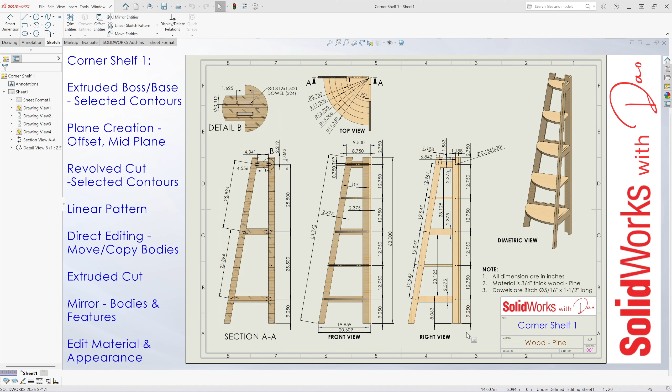File, new, part, okay. Save drawing as corner shelf 1.

Go to System Options, Document Properties tab, Units. Make sure the drawing is in inches. Dimensioning in length to 3 decimal places. Okay.

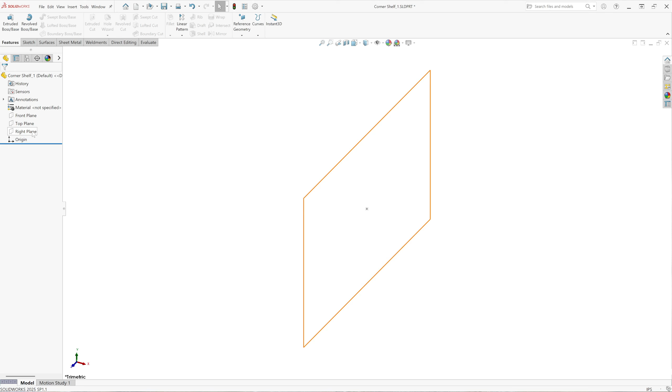Apply scene. I'm going to change the scene to plain white. I'm going to start off by drawing in the right plane. Select right plane. Sketch. Draw a rectangle.

I'm going to window select these 2 vertical lines, make relations vertical. It's not showing here. Okay. Window select these 2 horizontal lines, make relations horizontal. I'm going to show relations here, and it's horizontal, horizontal, vertical, and vertical. I'm going to turn it off now.

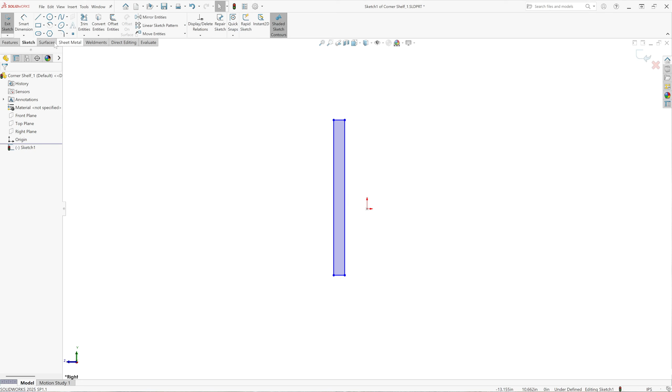Dimension, smart dimension. 2.375, 2 3/8 of an inch. Okay. Dimension vertical line here, 63 inches.

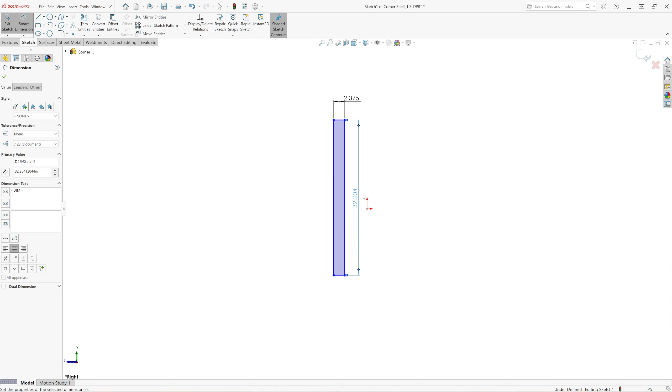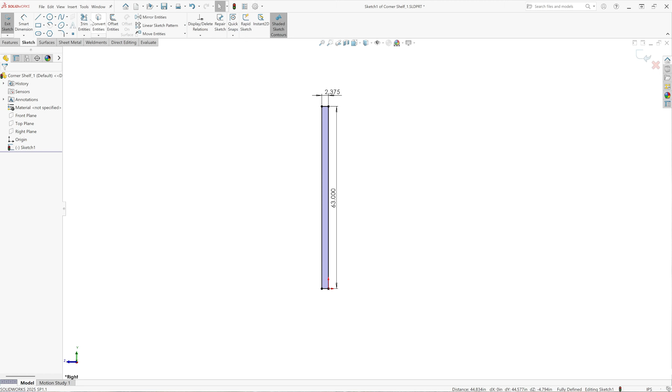Okay, I'm going to select this point, bottom right corner. Hold shift, select the origin, make a coincident relation. Okay, so the drawing is fully defined. I'm going to continue to draw the other parts, line, in the same view.

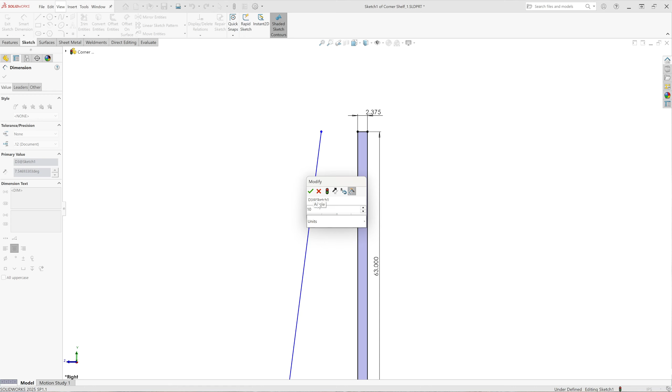According to the drawing, this angle between this line and this line is 10 degrees. I'm going to apply smart dimension from this point to this point. 8.750, 8 3/4 of an inch.

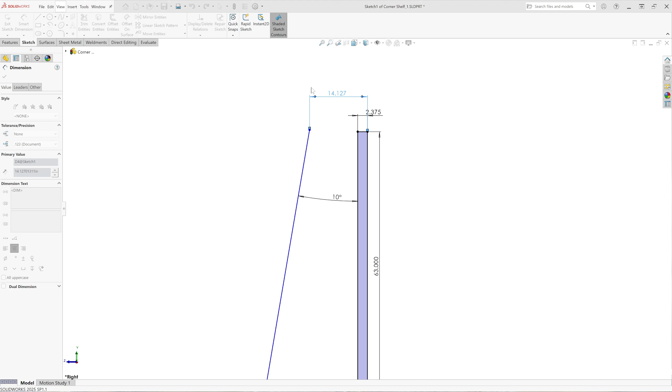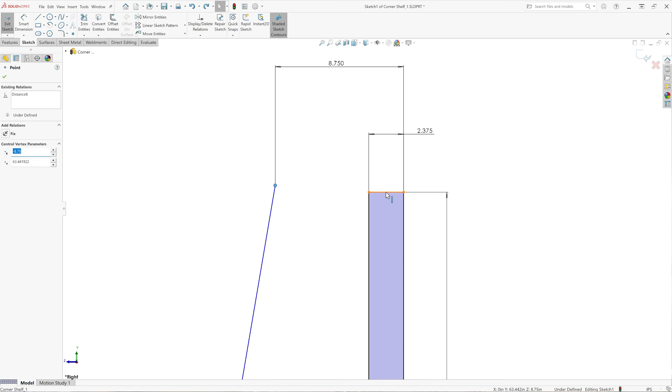Okay, I'm going to deselect smart dimension. Now I just want to add relations. Select this point, select this line, make coincident. Oops, going to undo that. Select this point, hold shift, that line, make coincidence. Okay, so I'm going to select this point, hold shift, select that line, make coincident.

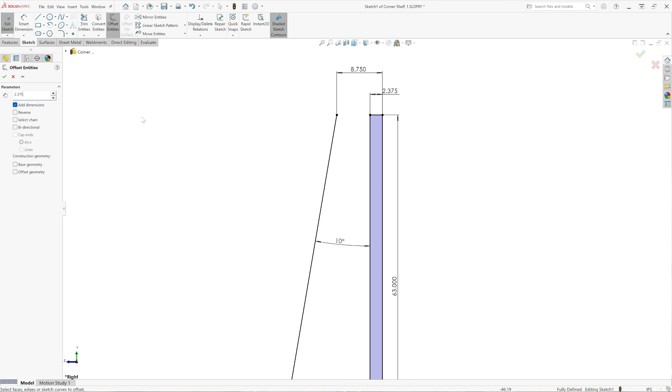All right, move this up a bit. I'm going to offset this line now, offset 2.375, 2 3/8 of an inch. From this, it's going outside, I want it inside.

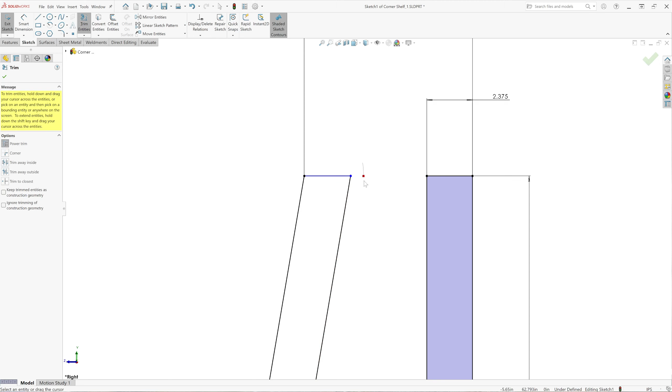Okay, I'm going to draw a line, keep this point at 180 degrees horizontal. I'm going to extend this line, trim it with power trim, and add relations to make it horizontal.

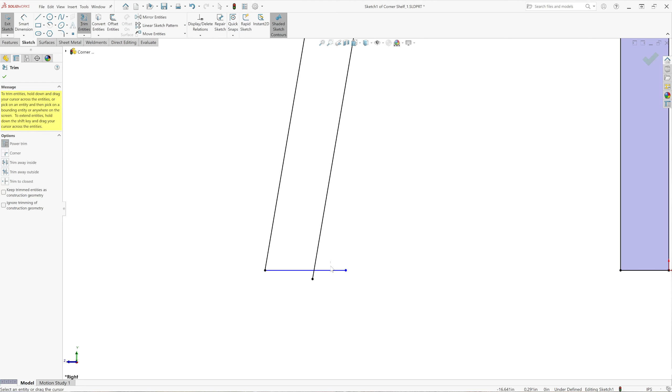Okay, I'm going to do the same down here. Draw a line at 180 degrees to the horizontal, trim it with power trim, select the horizontal line, and make relations horizontal. Okay, the drawing is fully defined.

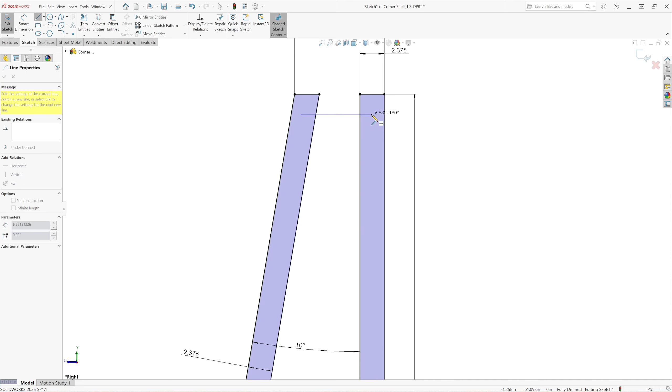Now I'm going to draw the other parts in this right side view too. I'll draw a line, horizontal, 180 degrees, and add a dimension. I'll make that horizontal relation just to make sure. Smart dimension from here to here, according to the drawing, is 1.5625 of an inch.

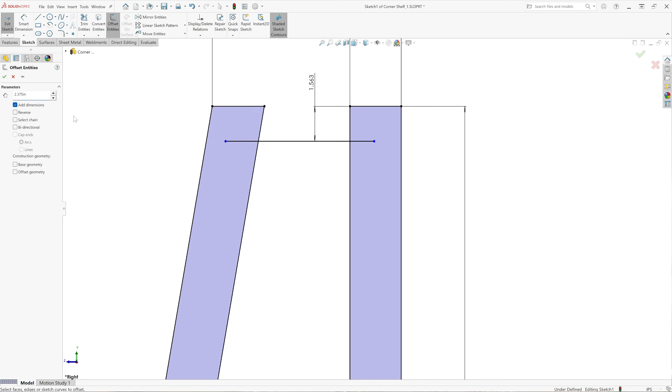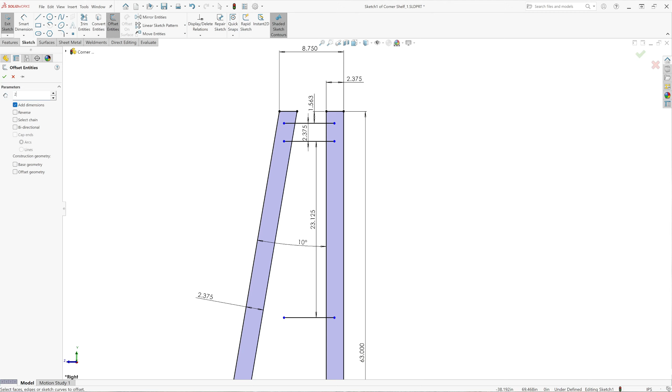Offset 2.375, 2 3/8 of an inch, down. I'll move that up a bit and do an offset again, 23.125 according to the drawing, from this line to this line. Okay, offset again, 2.375, 2 3/8 of an inch, from there to there.

23.125, 23 1/8 of an inch, from this line down. Okay, one more offset, 2.375, this line down. Now we're going to extend and trim.

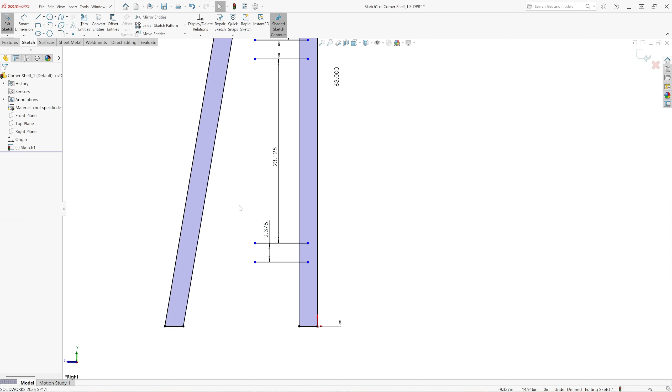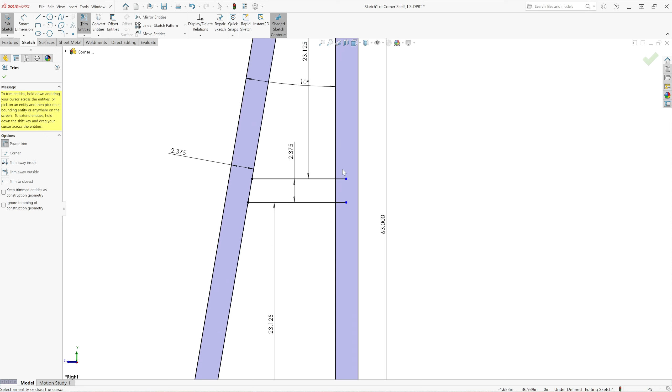Extend entities, extend, extend, extend. Okay, now trim, power trim. Trim that line, these two lines, and these two lines. So we have our right side of the frame.

Now we're going to do some extruding. Features, extruded boss base, selected contours. I don't want midplane, I want blind. I want it to be the thickness of the wood, 3/4 of an inch pine, so 0.750, and I want it to go to the right side, so the arrow is showing to the right side.

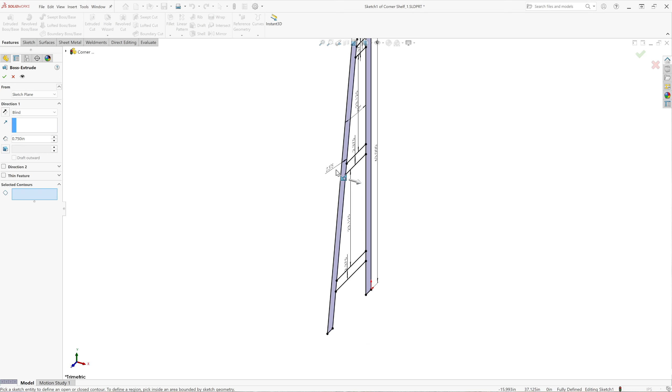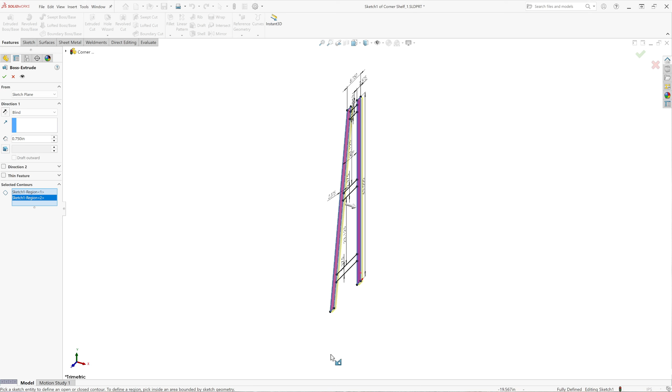Selected contours, I'm going to select this guy and select this piece. I'm going to extrude that first. If I extrude all 5, it will be one single body, so I'm going to do these 2 parts first, then the other 3. Now I've got my 2 bodies right here, 2 solid bodies.

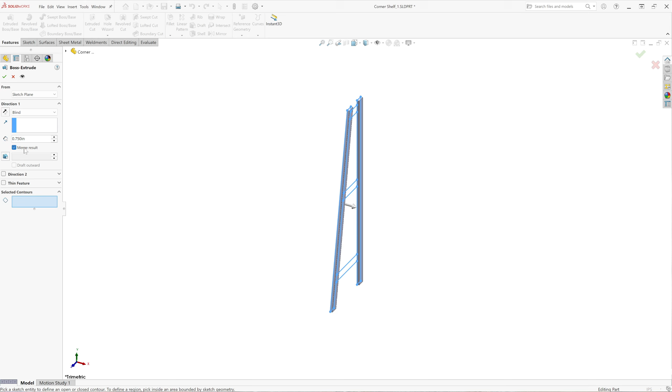Now I'm going to go get the other 3. I'll go to the drop down arrow, sketch, extruded boss base, blind, 3/4 of an inch. I don't want to merge results, I want it to be separate bodies. And select the contours: 1, 2, top piece, middle piece, and bottom piece. Okay, and it's going to the right again. So now I have 5 solid bodies.

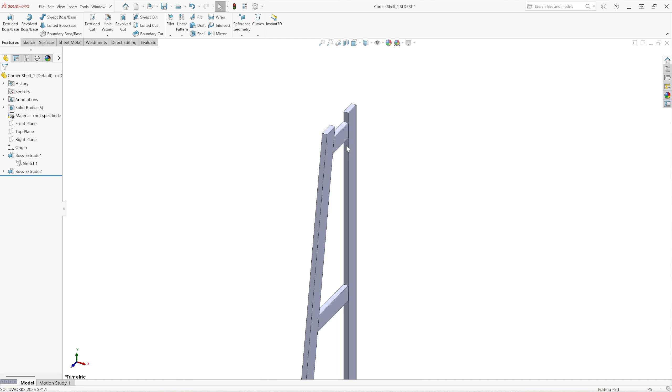Okay, 5 extrusions. Now I'm going to create a plane. Reference geometry, plane. Select that face, then select the inner face, and now it's highlighting the mid-plane. I'm going to show you on the top view - it's in the mid-plane of those 2 faces.

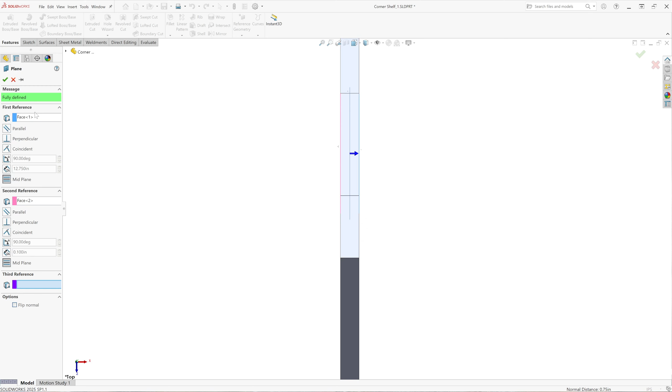Okay, I'll go OK, go back to isometric view. And it's in the middle, as you can see. Now I'm going to select the plane - you can select it here or here, whatever's easier. Sketch, okay.

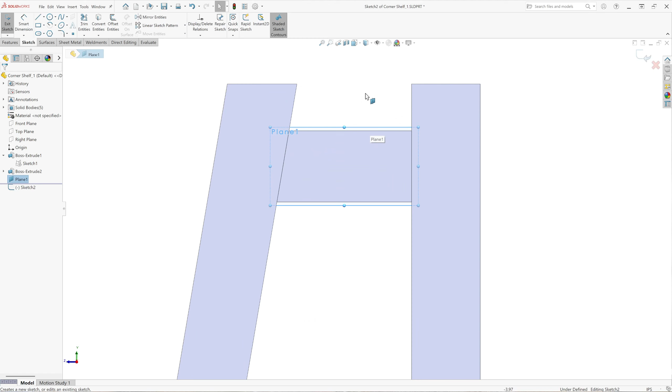And I'm going to select rectangle, draw a rectangle. Okay, add some relations, so window select - I'm starting from the bottom, going up. I'm going to make it a horizontal relation. It's not showing on my computer, but it is.

Window select these 2 vertical lines. It's not showing again, so that - but I'll show you here. And it's showing the relations here.

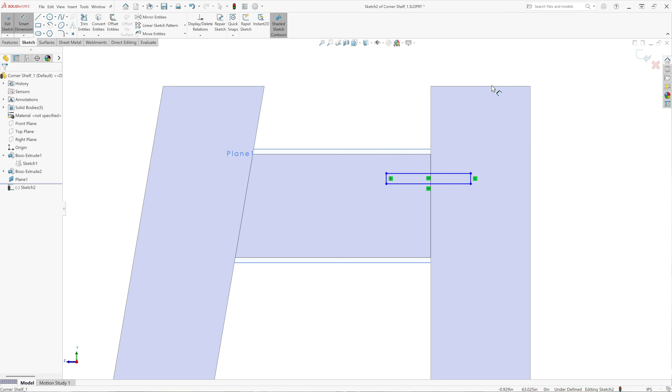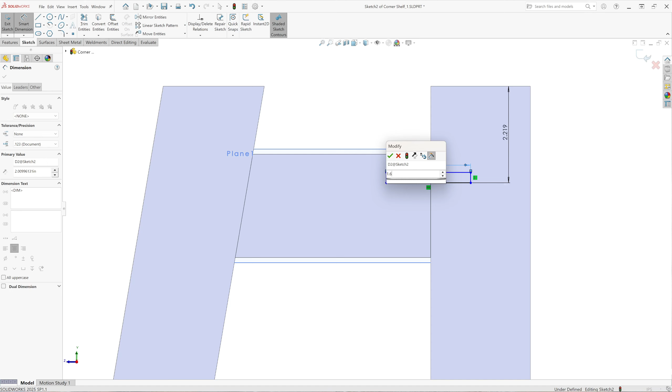Now I'm going to add some dimensions, smart dimension, from there to there: 2.219 according to the drawing, to the center of that line. Okay, to the center, to that line. And then I'm going to give this a dimension, 1.625, 1 5/8. We're doing the dowel holes here.

Okay, and then I'm going to give this a dimension - this is the radius of the dowel, which is half of 0.312, so it's 0.156.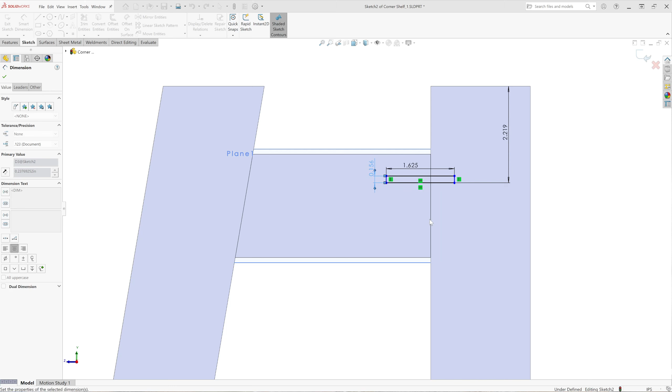I'm going to cancel the smart dimension, select this line's midpoint, hold shift, select this line right here - it's highlighted in orange - and make it coincident. Now our drawing is fully defined. I'm going to turn off relations, show relations. All right.

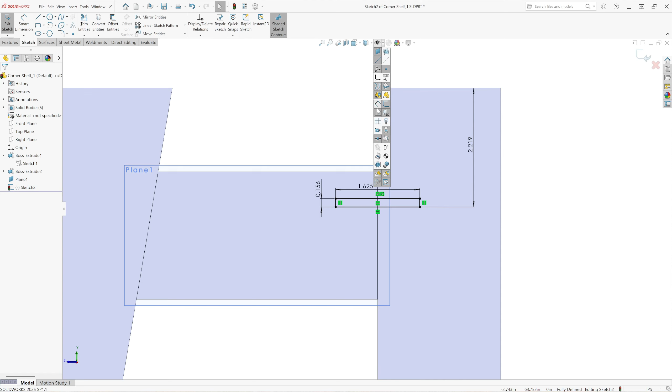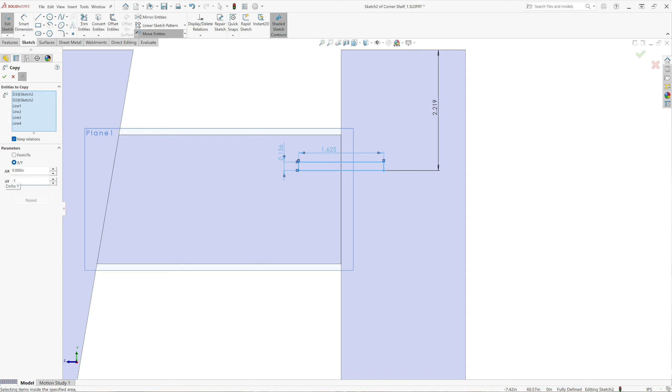Now I'm going to do a copy - copy entities, keep relations, X and Y parameters. I'll select this entity, window select that, and move it down in the Y direction, negative 1.219. That's the radius here, 0.156, plus the center to center distance of the holes according to the drawing, 1.0625, 1/16 of an inch - add those 2 together and get 1.219.

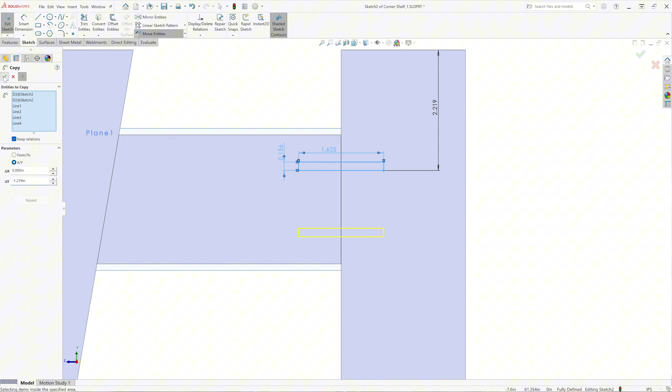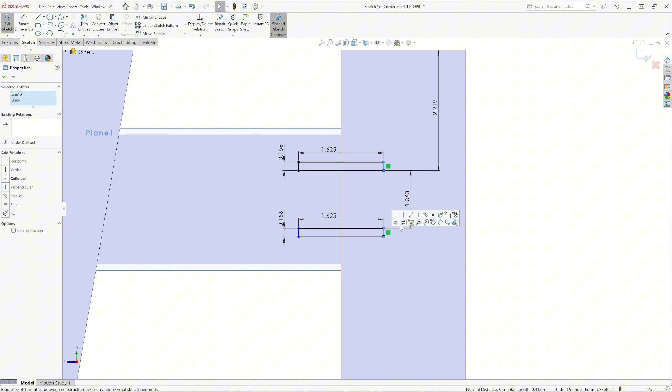Okay, I'm going to leave it there, not click anywhere, just click the OK check mark and it'll give me that. Now I'm going to do smart dimension from this line to that line, and that's the 1.063 I want. And now I'm going to add a relation - select that line and select that vertical line, make it collinear, and the drawing is fully defined.

Now I'm gonna do some more copies to get these holes on the left side. I'm going to go copy, select that, and now I want it to go in the X direction. From the center of that hole to the center of this hole, it's going to be 4.341. It's going that way, so I'm going to add a negative to it, go to the left, okay. I'm going to cancel it, and then delete this.

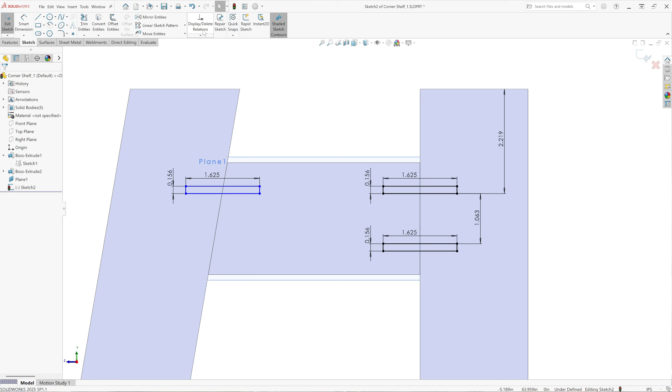I'm going to do one more copy for the bottom hole. Go copy entities, select that, keep relations, okay, and it's going to be negative 4.556. Oops, I clicked on the screen, let me see if I can just... it doesn't let me do it. Okay, I'm going to do it again. Copy, select, negative 4.556. And I'm not going to click on the screen or anywhere now, I'm just going to click OK. All right, so it gave me the copy.

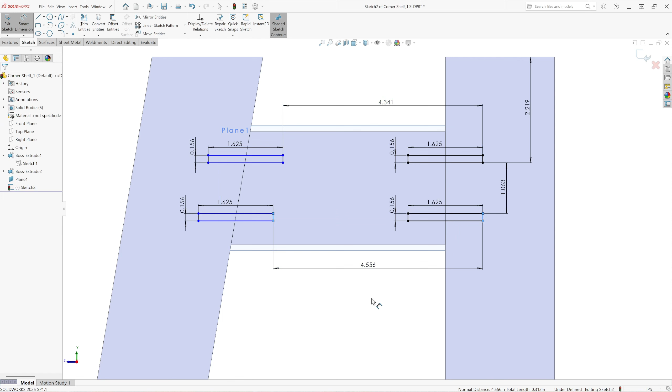The smart dimension from this line to that line is 4.341. From this line to this line, 4.556, center to center or edge to edge. So I'm adding some relations now. I'm going to add this relation to this line and make it collinear, and this line and this line, make it collinear. Okay, our drawing is fully defined.

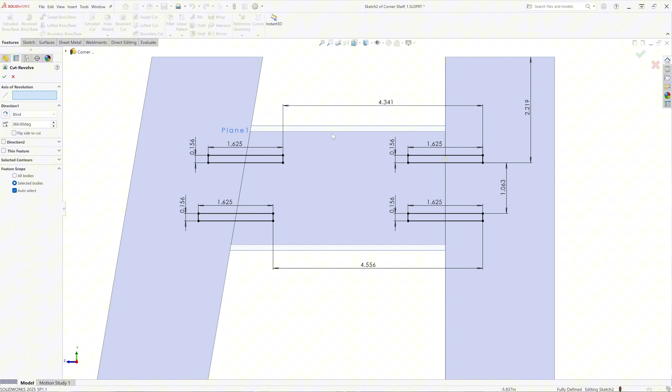So let's revolve cut these dowel holes. We're going to go features, revolve cut, axis of rotation, this line right here, blind, direction is blind, 360 degrees. And we want to select the contours, so I'm going to select this contour, one at a time. We can't see it, so I'm going to turn on hidden lines visible.

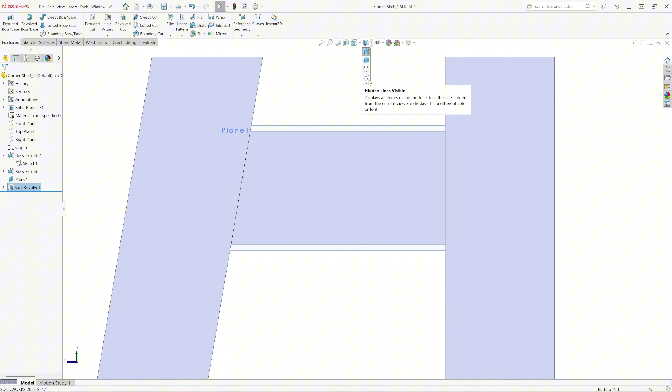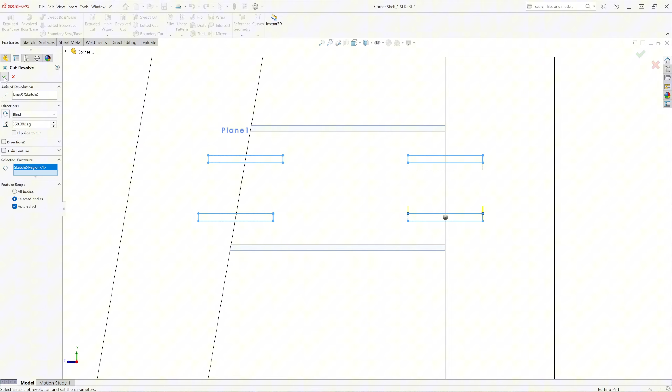And I'm going to do the second hole. I'm going to select cut revolve, revolve, sketch, revolve cut. Axis of revolution, select this top line here, blind 360 degrees, select the contour, select that contour. Okay, and we've got two dowel holes.

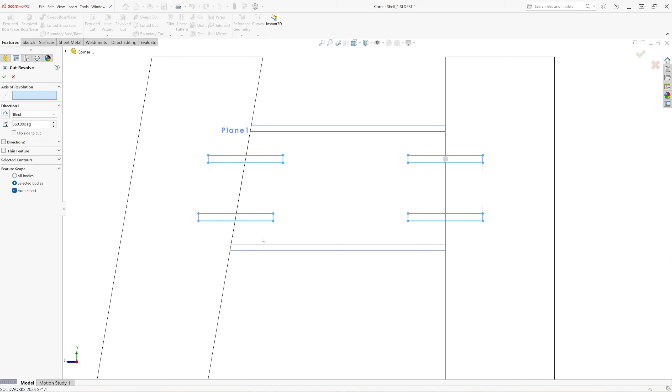Repeat it. Select sketch 2, right here. Revolve cut, axis of revolution, this one right here, everything's the same. Select the contours, select this. Rectangle, okay, we got 3 now and 1 more to go. Sketch, revolve cut, axis of revolution, this top line, blind 360 degrees, select the contours, select that rectangle inside. Okay, so we got our 4 dowel holes.

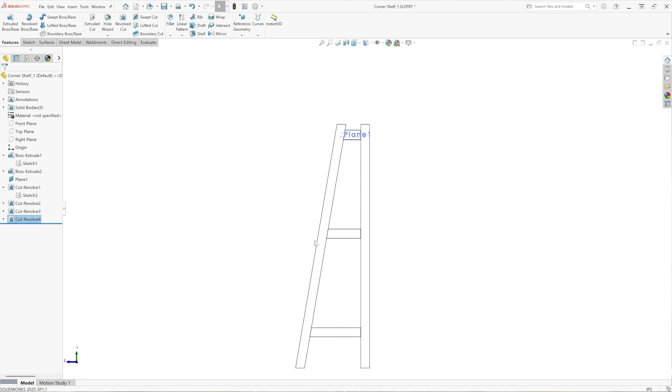So let's linear pattern this revolved cut for the other parts down here. We're gonna go linear pattern. I'm gonna show direction is down, that line right there, and I want 3 instances. Right here is 3, number of instances, 3. The spacing is 25.5 inches. And the features, I want features.

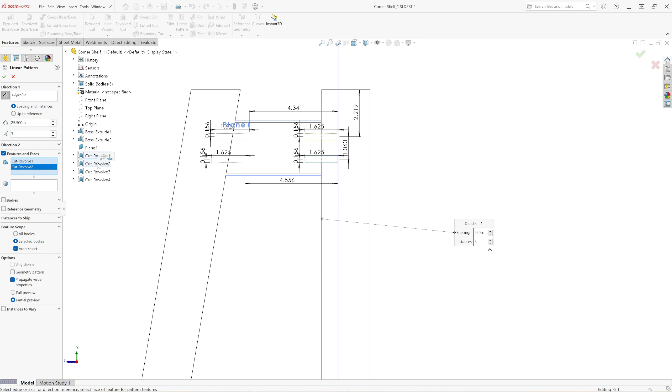I'm going to delete that, clear selection, and I'm going to select that drop down arrow, and go with the first revolve cut and the second one for that side. 1, 2, and it's going to show here in yellow. I don't know if you can see it, but I'm going to zoom in, yellow and here. So it looks good.

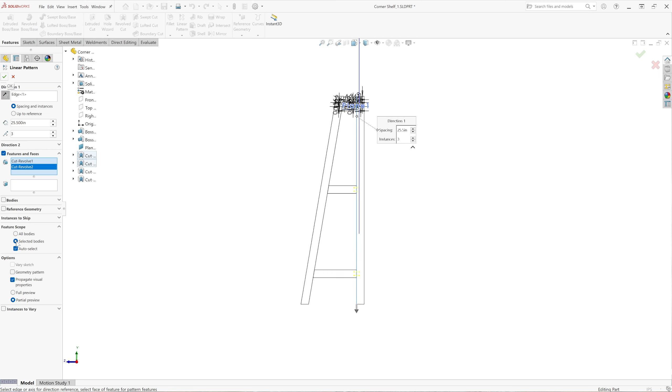And the edge is going down, the arrow is going down, so it's in the correct direction. Leave everything else the same. Selected bodies, auto select. So now in this hidden view, we see the other dowel holes, the other 4 are in place.

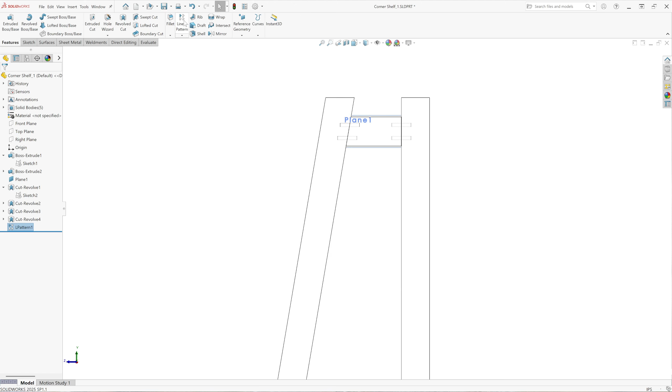Now we're going to do the same on the left side, but now this edge is on a slope or an angle, 10 degrees. So we're going to go linear pattern. Direction, choose this line, the arrow's showing down, which is the way we want it to be. The distance is longer, it's 25.84894 inches. 3 for number of instances.

Linear pattern, we're going to delete that, we want the other two holes. So cut revolve, we're gonna choose that again. Click that arrow, it's gonna drop down. Cut revolve 3 is this one, and cut revolve 4 is this hole right here. And we got it, everything is the same. We're gonna go okay, and just to show you, zoom out, that pattern is down here now, and here.

So those 4 holes are in place. I'm gonna turn on the shaded with edges, and I'm gonna show you, I'm gonna take this one part and this, hold shift, select them both, right click, and I'm just gonna hide it. And I'm gonna show you the holes are in place now that we can see it better. Those are the dowel holes that we just patterned. I'm gonna go undo to show those 2 pieces again.

Now I'm gonna go isometric view. I'm gonna hide this one, hold shift, this one, hold shift. And then I'm gonna right click, hide, to show you that the holes are also in these pieces, the left and the right piece. That one, that one, that one, the bottom, and the bottom.

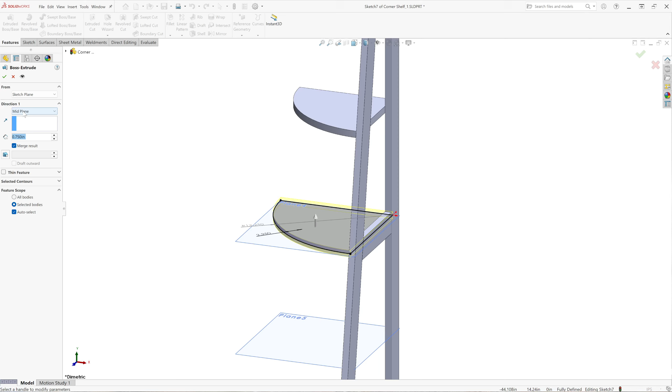Turn off plane 3, hide it, select plane 4, and sketch on it. Same thing: offset 2 1/4 inch, add dimension, smart dimension just so we know it's correct, then deselect smart dimension. Select this line, convert entities, select this other line, convert entities, extend. It's shaded, so Features, Extruded Boss, sketch plane, direction 1 midplane, 3/4 of an inch, and unselect merge result—we want a separate body.

I'll select this plane, hide it, click this plane, and sketch on it. Offset again, 2 1/4 of an inch, offset out, and dimension it just so we see what it is dimensionally. Deselect smart dimension, select this line, convert entities, select this other line, convert entities, then extend. Go to Features, Extruded Boss Base, sketch from sketch plane, direction 1 is midplane, 3/4 of an inch, merge result, then unselect it.

Select the 5th plane, plane 5, and hide it, we're done with it. Select the 6th plane, plane 6, sketch on it, and offset entities 2 1/4 of an inch, add dimensions, okay. And for the 5th shelf, we're just gonna make sure 17 3/4 is correct, okay.

Deselect smart dimension, hover over this line, select it, convert entities, hover over this vertical line, convert entities. Now we're gonna do the same thing one more time, extend this one, and extend that one, our profile shaded. Extruded boss base, okay, sketch plane, mid plane, unselect, 3/4 of an inch thick, unselect merge result, okay. Select the plane, hide it, we're done with it.

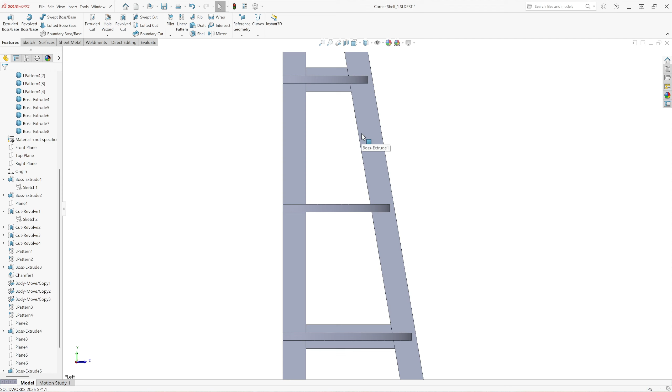Okay, so we're gonna add some screw holes to the frame on the right side. So we're going to use... I'm gonna close that folder. I'm going to go to the right plane now, sketch, circle.

Okay, smart dimension, 0.156 of an inch, 156 thousandths of an inch I meant. Okay.

So we're gonna do a dimension vertically from here to that center of the hole, 2.750, 2 3/4 of an inch from that edge to the center of the hole, okay.

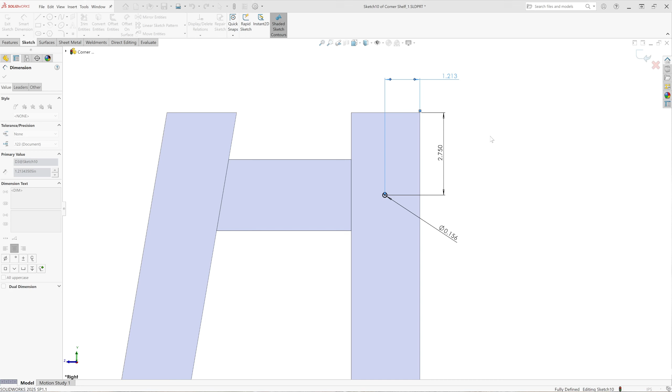And then a horizontal dimension. We want it in the middle, so it's 2.375 divided by 2, okay. 2 3/8 divided by 2 gives us 1 3/16. So it's in the center of that piece.

Now we're going to draw a center line from that center of the hole over here at 0 degrees. I'm going to add a relation of horizontal, make sure it's straight. I'm going to offset this line.

Okay, I'm going to go 2.375 divided by 2 is that, and I'm going to offset this line inwards. That's the center of that piece.

Okay, I'm going to do a trim, and I'm going to delete this, I don't need this now. I got my center point for the hole. Oops, this is not correct, so I got to do that again.

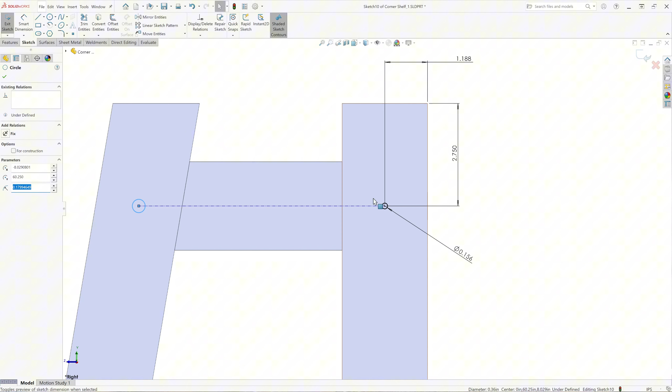No, I don't. Okay, so I'm just going to go draw a hole right there, and I'm going to make it equal to this hole, okay.

I'm going to do a smart dimension from that center to that center. Okay, 6.842.

All right, I'm going to delete this line. I'm going to add a dimension, this edge to this edge. There we go, all right.

Now I'm going to do linear patterning to get the other 4 holes on this side and 4 holes there, plus those 2, that gives me 10. 5 and 5 is 10. Okay, so I'm going to deselect that smart dimension, so linear pattern.

Okay, I'm going to select this line for the x-axis. I'm going to select this edge, and I want 5 of the instances. Dimension x spacing, and the spacing is 12.750 according to the drawing, center to center from holes. Okay, entities to pattern, okay. Direction 2, I'm going to leave it alone, I only need one direction, direction 1.

Okay, so this hole, it's going up, the blue line's going up. I want to reverse it, so now it's going down. And I have my holes in place where I want it, okay, in yellow. So I'm going to go okay. So you can see it's right there. 1, 2, 3, 4, 5.

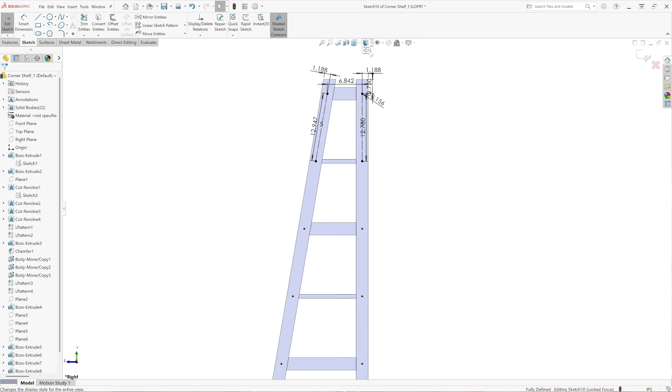Now I'm going to extrude cut it. So I'm going to isometric view to see it better and zoom in. So I want to cut it into the shelf and also outwards through the frame. So it's going to be 3/4 of an inch in and 3/4 of an inch out, so that's going to be 1.5 inches.

Extruded cut, features extruded cut, zoom in. Okay, midplane is correct, okay, and I want this to be 1.5 inches, and it's showing it's going to cut out and cut in both directions. And I'm going to go okay.

Okay, and I'm just going to hide this to show you. Okay, hold shift and hide it. So now it's cutting into the shelf 3/4 of an inch. Okay, that's our screw hole positions.

All right, and I'm gonna undo to unhide that. Then I'm gonna hide these 3, top, middle, hold shift, okay, right click it, hide it, and it's cutting.

Oh, I didn't have to do that. Sorry, I'm showing you the, all right.

So now we have our screw holes in place, 10 of them. Now we have our right side, our 5 shelves, so now we're gonna mirror this to get the left side.

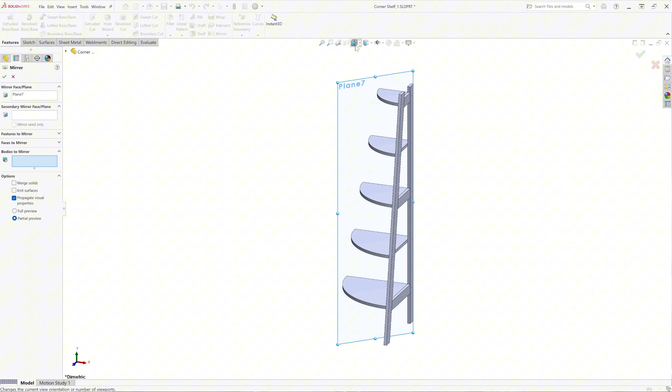We're gonna mirror about that plane. I'm gonna select mirror, face, plane, and select plane 7. I want bodies to mirror. I don't need the shelf, so I'm gonna go to the front view and window select everything here on the right side of the frame. It's gonna give me 17 bodies. I don't want merge solid, so that's good. Now I have a total of 39 bodies showing right here.

So now I have basically the corner shelf design. I'm gonna hide the... oh, nope, I'm not done yet, I gotta do one more feature.

I'm gonna go mirror, same thing, plane. Instead of bodies now, I want the features to mirror, and I'm gonna click this arrow at the top left to select those 10 screw holes, to mirror over to the other side of the corner shelf. I'm gonna double click that to get my 10 holes, and it's showing yellow, highlighting it. Then I'm gonna go okay, everything stays the same.

I'm gonna turn this over and show you. So the holes are going through the left side of the frame pieces. I'm gonna select, shift right click, hide, and it's showing the cut of the holes mirrored into the shelf and the frame on the left side.

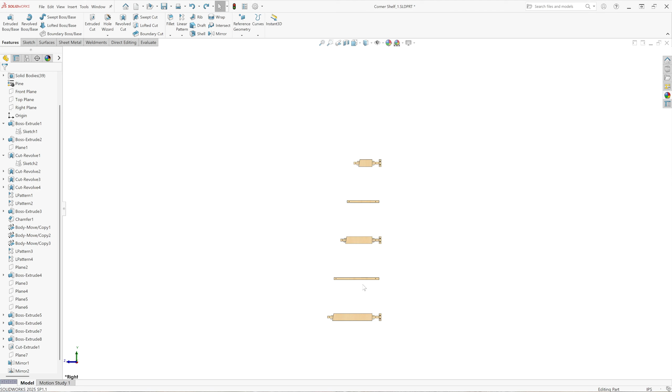Now I'm going to turn on, go over here to the solid bodies. These are hidden, so I'm going to select cut extrude 1, hold control, cut extrude 2, it's highlighted, mirror 1, and mirror 2. I'm going to right click it and show it, then go to isometric view.

Looking at it from the top, the left side view, the front view, right side view, and isometric view.

Okay, there we have it. The corner shelf is designed.